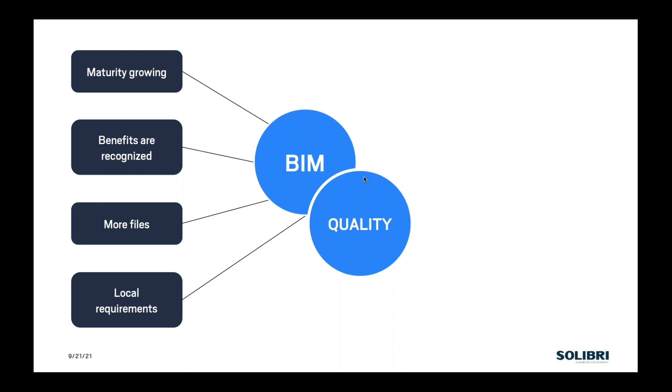We're generating more files, we've got local standards and mandates that we're understanding. But really, when it comes to quality and Solibri at the moment, we see there's a need for high quality information. We can see that quality assurance and quality control is more than just design coordination and clash detection.

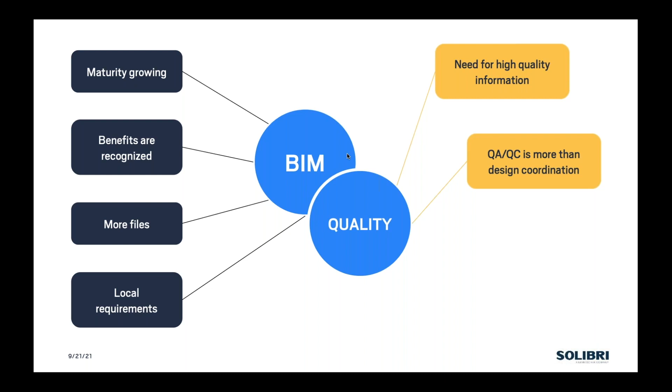For those of you using Solibri and utilizing rule sets and classifications, you'll understand and have seen the benefits of exactly what there is, whether it's fire stopping or egress analysis. Simon's going to talk a little later about the big picture on rules in general, but also go into some detail on what these rules are all about that we're discussing today.

Awareness of problems throughout the life cycle of build - I'm going to talk a little bit about the cost of issues and when to resolve them, and why it's best to do it at the earlier stages.

But naturally, big buzzwords like interoperability - a huge focus point for Solibri this year has been all around opening up our tool to be available within others, making sure that Solibri is a massive endorser of OpenBIM, which I'm sure a lot of you are aware, using file formats like IFC, BCF and COBie.

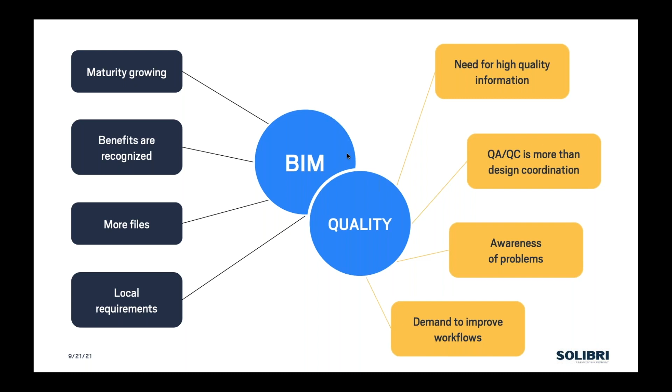So we know this already. When we're referring to things like quality, we understand the importance of both time, money and scope as huge factors towards improving our standards and improving our workflows and processes surrounding quality. We're going to get into a little bit more detail on how we break that down today.

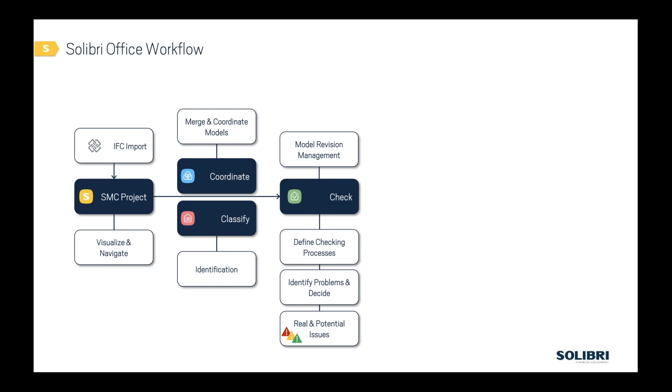And that's encapsulating the introductory level of Solibri through to being able to identify problems, a huge core part of Solibri. But once we've found those problems, we're going to want to communicate them.

So within the communication area, we've got tools such as BCF Live Connector, which enable us to integrate with issue management systems on the cloud. We can export those BCFs out if we want to, and share both Excel reports, BCFs, and communicate with people the issues and challenges that we found from our checking results.

But the functionality that we're talking about today are new rule set templates to do with egress analysis and fire-stopping rules, which is the exciting demonstration and presentation Simon's going to do in a little while, which is the way in which we can more intelligently and deeply find potential issues with fire-stopping.

And it's only once we've managed to locate these problems, fix these problems, can we really start to do information takeoffs, deliver COBie, deliver our models, and understand that that information is reliable and fit for purpose. So that's the bigger picture on the Solibri Office workflow, which we'll get into a little bit later on today.

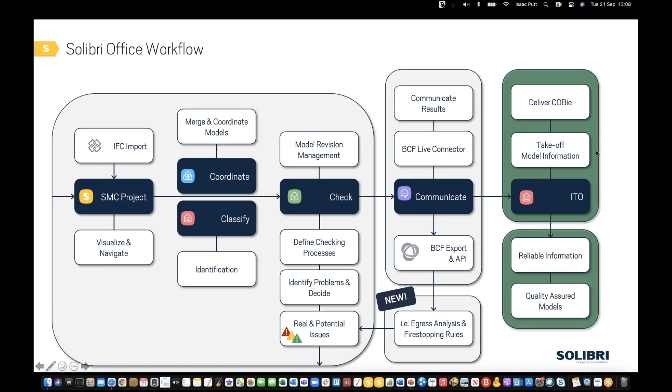So we're going to talk a little bit today about fire stopping and using digital technology to make the right decisions. So you'll see littered through this presentation, there are a few QR codes that you can use to access various bits of information.

So for those that aren't aware, Ridge Partners, we're a multidisciplinary property and construction consultancy. We have over 600 employees spread across 12 UK offices, and we pride ourselves on 80% repeat business, and we're 75 years old this year.

So today, my name's Brent Rees, and I'm a partner with the business, and I lead the digital engineering team. I'm going to talk a little bit about the basics of fire stopping and why it's such a challenge in the construction industry. Then Alex, who's a team manager within the team, is going to talk through how we use Solibri to mitigate some of these challenges. And then Mike, who leads some of the digital engineering activities across the business, across our multidisciplinary organization, is going to talk about the benefits for clients and how we might repurpose that for existing buildings.

So a little bit more about digital engineering and our consultancy services. We provide services on projects up and down the country for a mixture of end clients and contractors and other consultants in the industry. We do a lot of work in the information management space, and it's something that Alex particularly specializes in, using tools like Solibri. So the development of requirements and support in the delivery of COBie on projects.

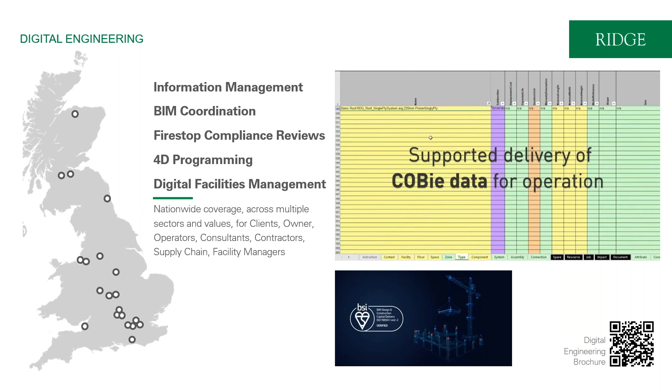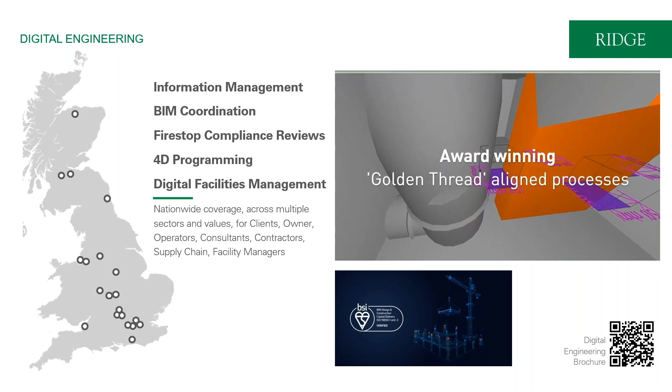Similarly, BIM coordination, another key activity for us, and we do a lot of that for main contractors, where we again utilize tools like Solibri to identify issues on projects and report those back to the team. Firestop compliance review. So a little bit of what we're talking about today is about using models to better design, specify, and utilize information for fire stopping. We'll touch on that a little bit more.

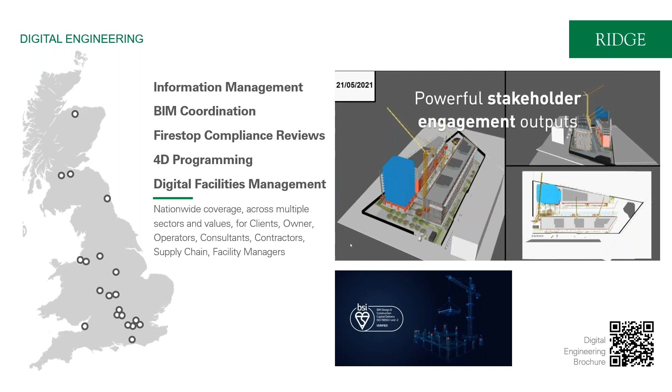4D planning, so the use of tools to bring models and projects to life against construction programs and simulate the sequence of that going together. And the final piece about digital facilities management and consultation in that space to allow clients to make better decisions and use tools to better manage their buildings in a more efficient manner.

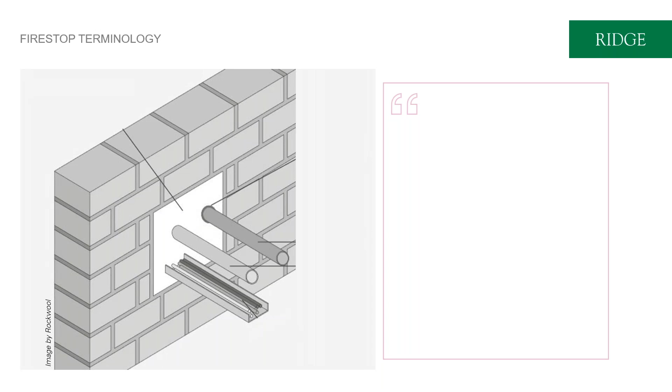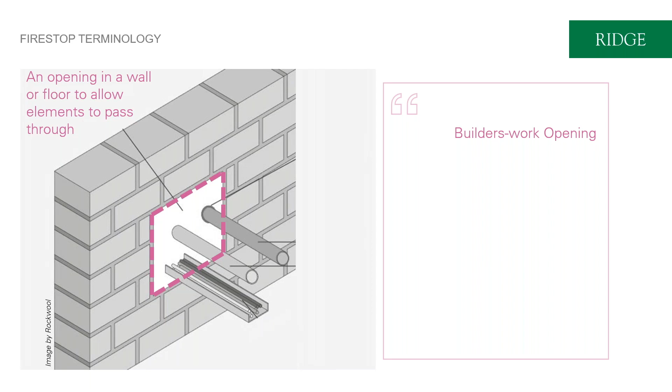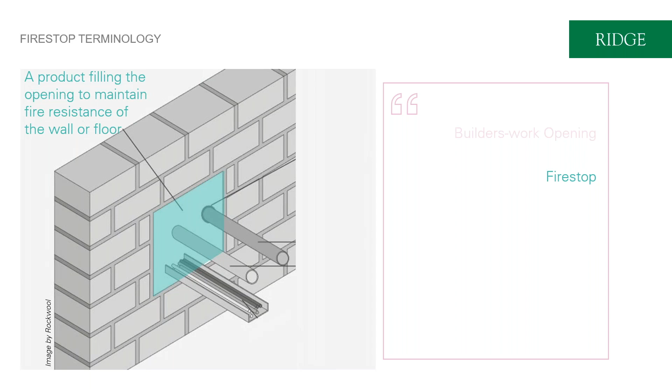So fire stopping, the golden thread. So for my section, if we move on to the next slide. So to recap on some of the basic terminology. So in projects, we'll have a number of openings in walls to allow services to pass through, commonly referred to as builders' work openings. In order to maintain the fire resisting performance of that wall or floor, that opening needs to be filled with a fire stop. So we'll make reference to both of these as we step through.

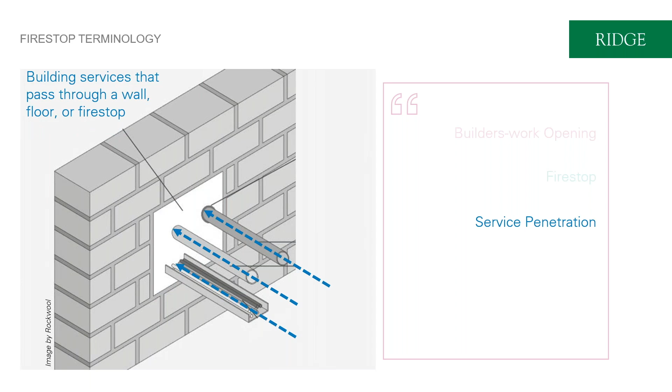A key part of what we're going to show you is related to service penetrations through that builders' work opening and through that fire stop, because that influences the design and specification of the fire stop. Service spacing, so the gap between the services that penetrate that fire stop, is a really important criteria in that, as is the aperture spacing, so the gap from the service to the edge of the builders' work opening, shown in that diagram.

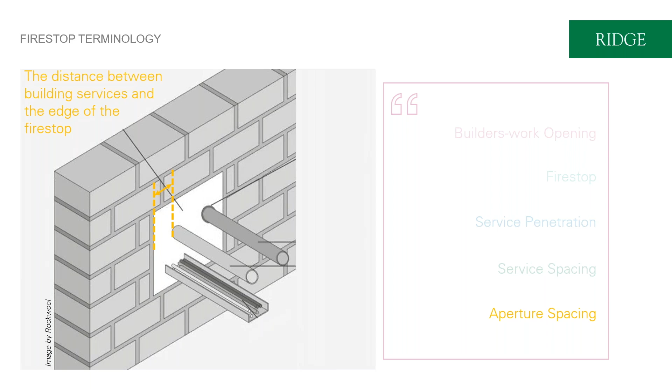So fire stopping generally, anyone who's worked on a construction project will probably sympathise that fire stopping is a notoriously complex and often difficult package to design and get right, because of inputs required from lots of different parties. What really needs to happen is there needs to be better clarity on who actually leads in the design and specification of those, as well as builders' work openings and any dampers that might be applicable to any ducts passing through that.

There's also complications around PI. The PI market is a notoriously difficult place at the moment, and is the PI of a lead designer adequate for them to carry out fire stop design and specification? And then looking across into construction and operation, the process of installing these and then managing those through operation again is a notoriously difficult aspect of fire stopping. Next slide, please.

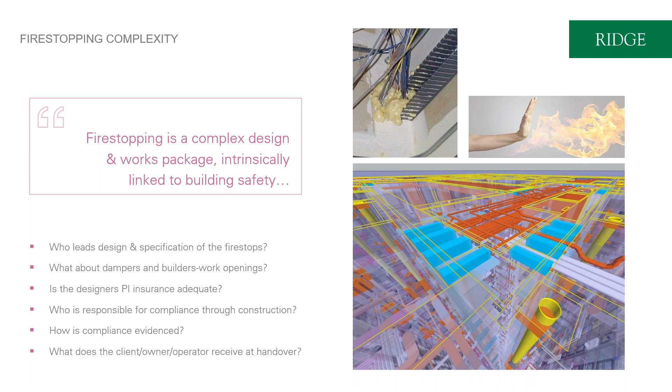Add to that, Approved Document B of the Building Regulations has always had a line within it that any proprietary sealing system, i.e. a fire stop, needs to be shown by test to maintain the fire resistance of the wall, floor or cavity barrier, meaning that if you have a fire stop in a builders' work opening and a configuration of services penetrating, that configuration needs to be shown by test to perform for the required time period.

The difficulty with this is that only a finite number of scenarios have been tested. So there's a rule for different types of materials of services passing through a fire stop, which need to be understood and applied to the specification of a fire stop.

On top of that, I touched on the multi-party process that is fire stop design specification. With regards to this scenario, you would have one party that would ordinarily design the partition and the opening within it, and another party that constructs it. It would be another party that would design the services, the service distribution, and then another party would install them in the spaces accordingly. And then it would be another party that specifies the fire stop and installs the fire stop.

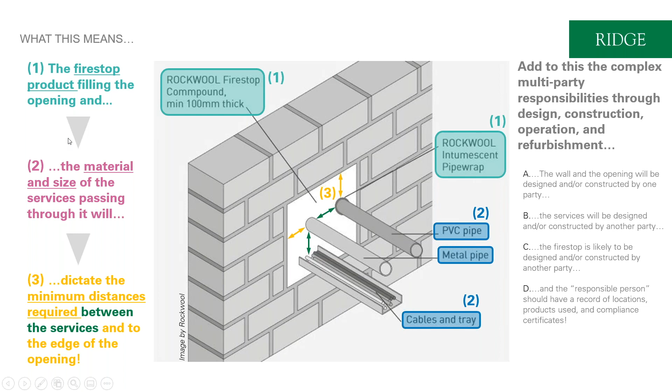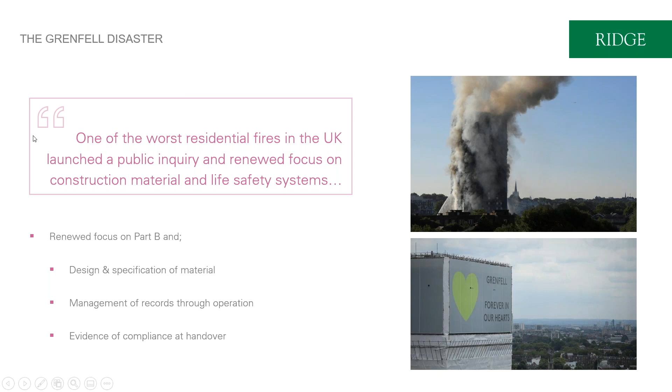Add to that that the client then has a duty to maintain that through operation and understand the decisions that were made through design, and that further highlights the complexity of the situation. Add to that, a few years ago the Grenfell disaster brought renewed focus on design and specification of materials generally, and so whilst that wasn't directly attributable to fire stops, it's clearly a key aspect of fire design in buildings.

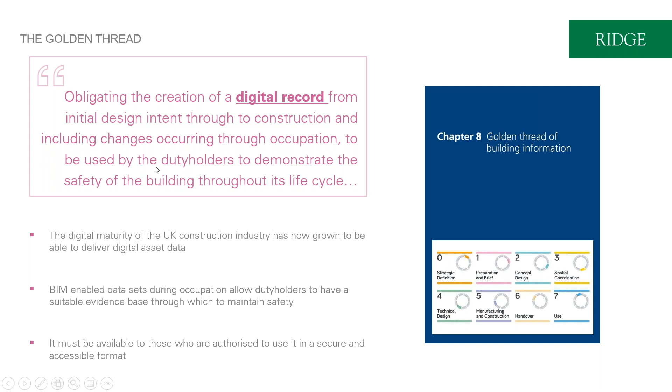A spin out from the Grenfell disaster was the Hackitt report, which made some pretty stark recommendations about the state of the industry and aspects that needed to change in order to give residents a safer place to live. And if we go on to the next slide, a key component of what's come out of this is the golden thread, a recommendation from the Hackitt report, which recommends the adoption of digital and BIM processes in order to better deliver information to the clients at the end so they can better manage information about the building through operation. And I won't touch too much more on that because I'll pass over to Alex.

Thank you, Brent. So I think you set out some of the issues that happen with fire stopping. So let's have a look at the digital approach that we've developed to try and alleviate some of these. So this brings us back to 2015, before my time at Ridge. Fun fact, 6 years ago, isn't that scary? To the first project where we worked on to develop these rule sets and how we went about it.

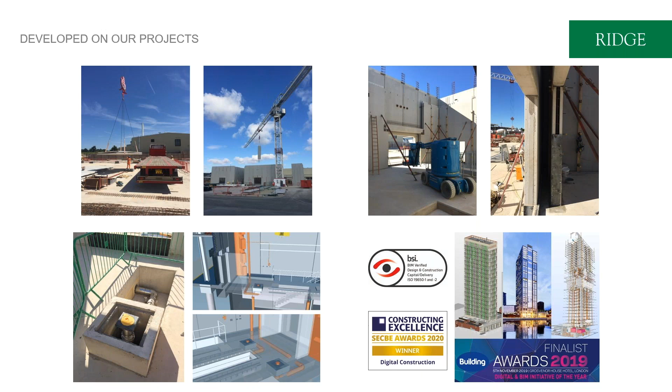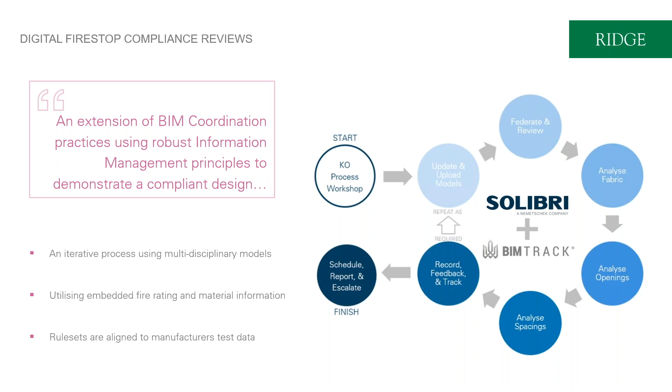A lot of this is best done in a BCF tracking platform, and comments can be made. But as you can see from the process diagram, it's about federating the models, analyzing it's got the right information in there, analyzing the size of the openings, the distances of the services, the distances between the services and the edge of the openings, reporting these as issues, and then eventually scheduling these out so that it can be improved on site. And it's really important, one of those bullets on there is that these rule sets are aligned to real manufacturers' products and real test data for the information that will give the value.

So who's this relevant to? A common misconception will be that it's only relevant to high-rise residential buildings, whereas it's not only relevant to all residential buildings, but most buildings. There's fire stops in most buildings, there's fire compartmentation in most buildings, and this really should be something that is looked at and done, as Brent highlighted, on most buildings. It'll be useful for designers. I think fire stopping is one where you might hear audible groans from designers when it's mentioned, because it's left out of scope.

It's quite a grey area of who should be doing what, and it's not always something that is done well and is something left to the last minute, and you end up with changes on site. So getting a better design, improving set roles of who's doing what, will also improve professional indemnity insurance, PI insurance. It's useful to contractors for reducing risk on site and for the buildings that they deliver, but also through pricing.

So if all of the openings are designed, the sizes are known, the product manufacturer has been chosen, then the contractor will know how costly it will be to procure the fire stopping products, how costly it will be to actually install them, and it will reduce risk for when they're tendering and for their price, and also for when they're tendering for maybe an M&E design to an M&E subcontractor package.

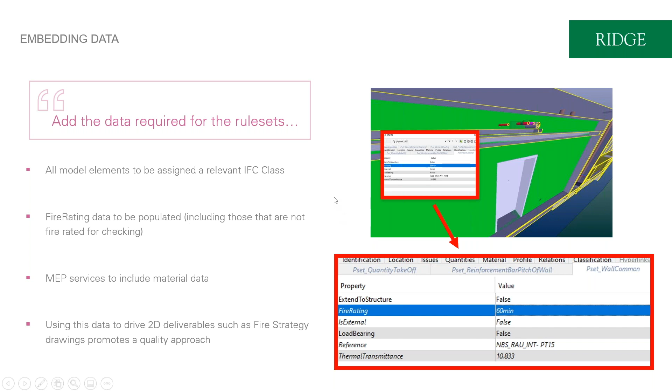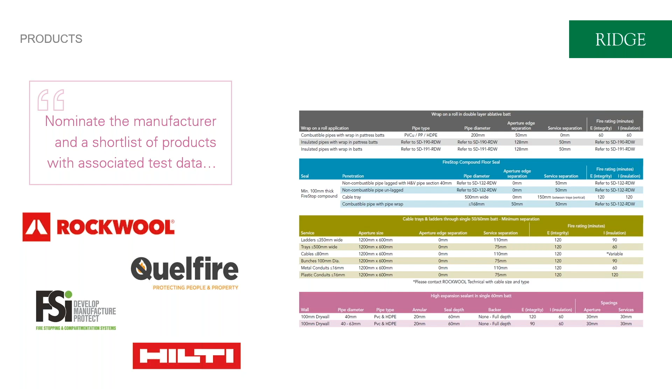Modeling of builders works and fire stops. This doesn't necessarily have to go straight away. You can test the distances between the services before you do that, but ultimately a lot of these services will be put into these sort of letterbox openings, and the arrangement of these services will have to be reviewed and set out, and the distances between the services and the edge of the opening will have to be measured. So at a certain point in the process, it's really important to model these builders works and fire stops and start to put in what Firestop product has been chosen, who the manufacturer is, and then that will bake into what Mike will talk about later in terms of itemizing these, and then what an owner operator does with these in terms of on-site checking.

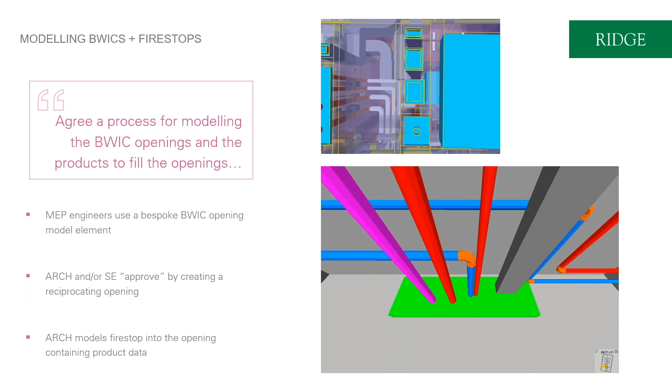So that's my bit over. I'll hand you over to Mike.

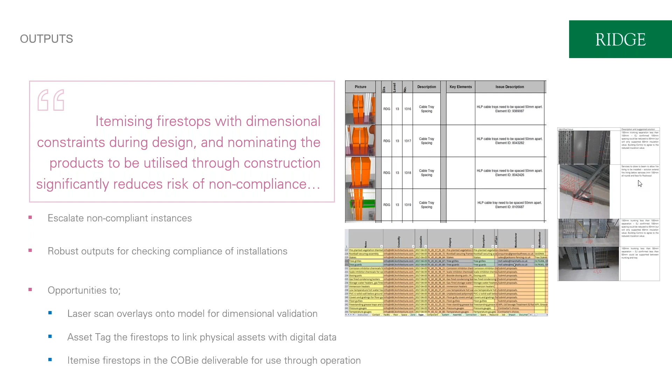Hello, everyone. I last saw these slides before I was working at Ridge, when I was in a client organization at a university as a BIM manager there. And the first thing that sprang to my mind is how many day-to-day running problems this methodology could fix once it's met handover. So the question I'm asking is, can we take this robust process for fire compliance checking of design information and apply it within existing buildings?

So why would we want to do this? 2 out of 3 of today's buildings are still going to be here in 2040. So as problems go, the construction process is only going to fix 1/3 of the overall issue. So we've got this responsibility to ensure that the buildings are safe. And we know if we're going to try and check all of these builders' works openings manually within buildings to make sure that they're compliant, that's going to be a really hard process. And the other issue adding to that is that as buildings change over time, small works contractors might not have considered fire stopping as they've put new services into buildings. So we've probably got the situation that our fire compartmentation lines could be breached. So the question is, shouldn't we use all of these digital tools that are at our disposal to solve the holistic problem?

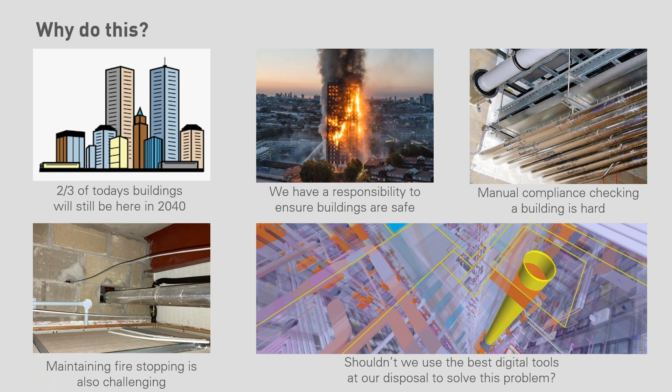So what benefits is that going to bring to building owners? Obviously, life safety is the most critical of these issues, but then also things like the protection of property, the ability to reduce insurance premiums, ensuring that we're compliant with legislation. And I don't think there's anything quite as bad for someone's reputation as their building burning down or something like that. So what this could do for reputation is also worth considering in that mix.

So what are the challenges? Alex and Brent have done a great job of outlining what this process looks like. But what changes when we move into existing buildings is that the data is bad. During construction, we've got lots of information available. As we look at an existing building, that's not there anymore. So there are a few things that we need to do. First of all, do we have a fire compartmentation plan or any information on where the fire compartmentation lines are within the building? If we don't, we might need to do a survey to understand what the fire compartmentation should be within the building.

The next thing is record information. You could see from the process that's been outlined that we need to know what the fire stopping material is, and we need to know what the service types are that are running through that fire barrier. If we don't have that information, we might have to do a lab test on the fire stopping material.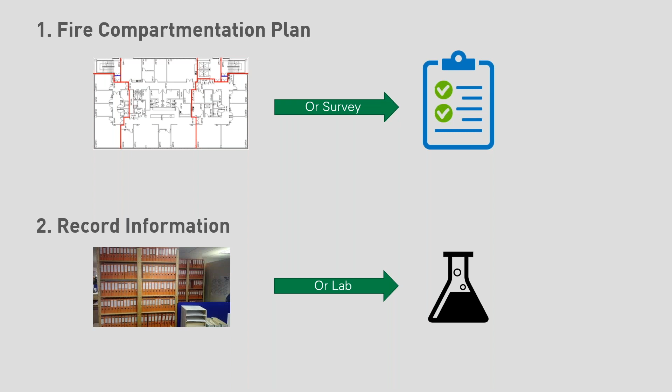And then step 4 is we're going to have to go to site to gather data. Before we do that, we need to make sure that the site is safe for us. So is there existing information around asbestos risk if we're going to have to lift ceiling tiles and things like that, or do we need to do asbestos surveys and safety surveys on site?

Then we can utilize a range of different technologies to help us gather data on site. Point cloud scans, Alex mentioned, but there are also other useful technologies like 360-degree photographs. Standard photography is really good. And there are these devices called confined spaces drones, so you can put drones into areas to undertake photogrammetry and things like that as well.

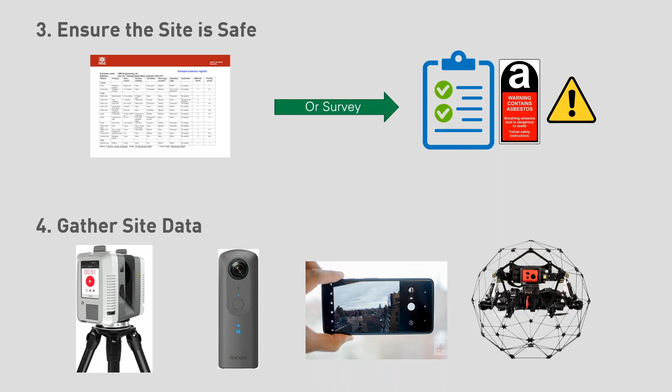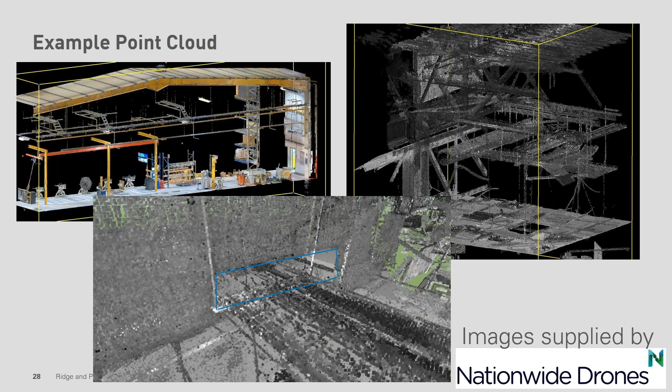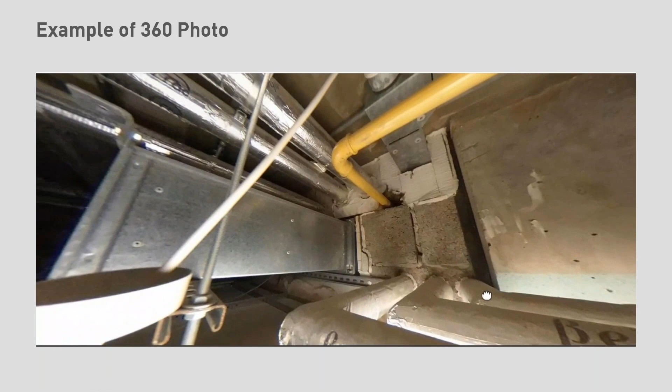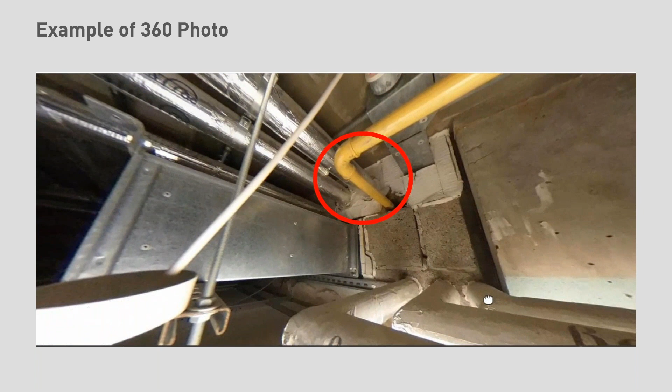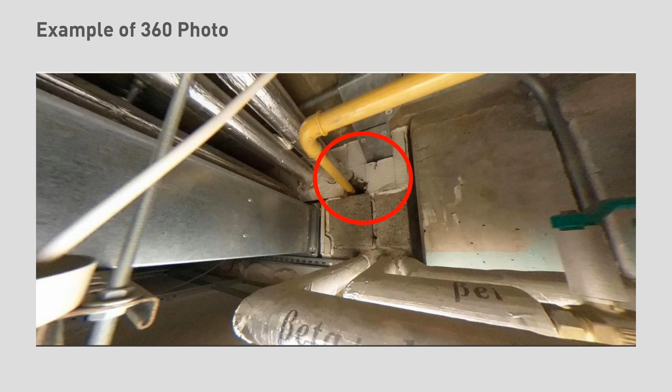This is an example of a 360-degree photograph. Really nice because it gives you that additional context that you don't get with a standard photograph. You can pan around, and I messed up this graphic. I was trying to show here that there's been a pipe added in later, going through the fire stopping material, and the fire stopping material hasn't been filled back in. So that's a problem for that fire barrier.

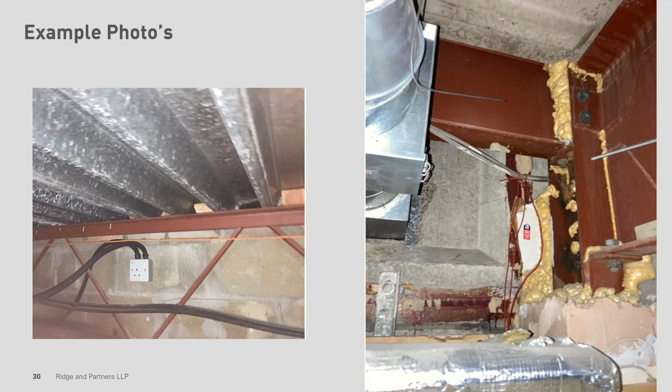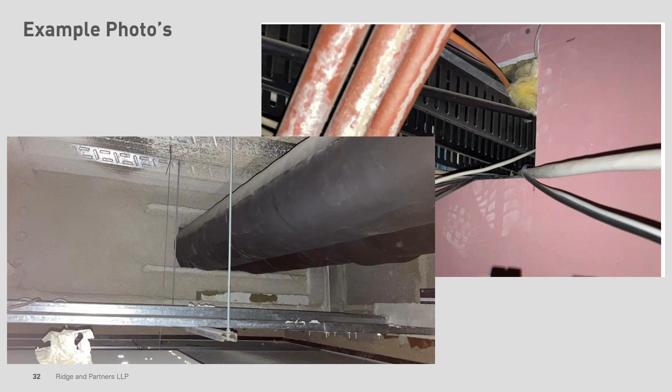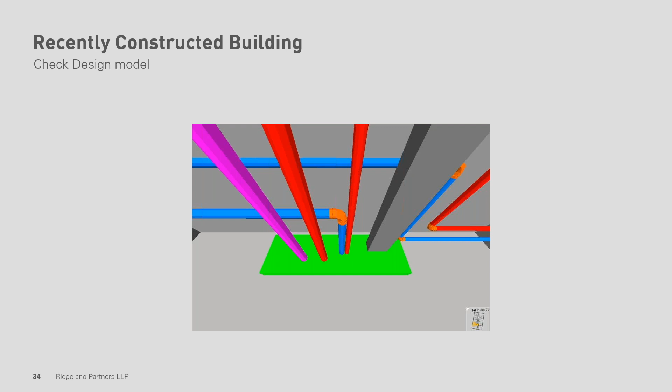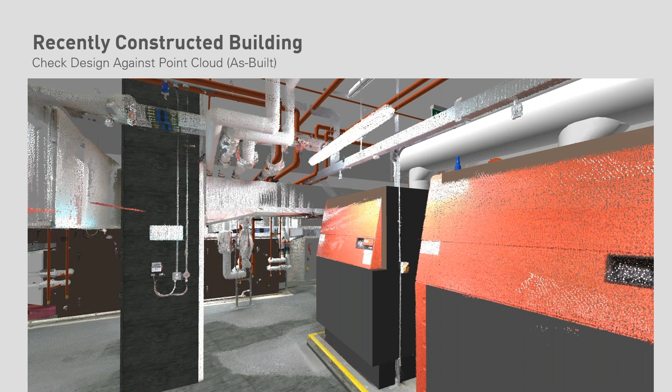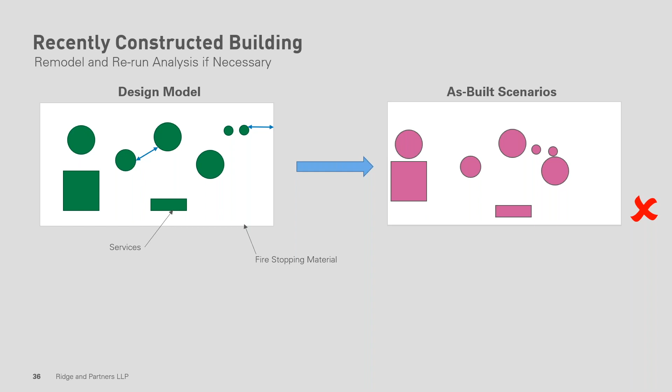The next situation, we're missing that fire stopping material, so we've got a gaping hole, which clearly represents a problem. And then the final situation is the fire stopping material is in place, but the services have moved, and now they're too close together, so again we have an issue.

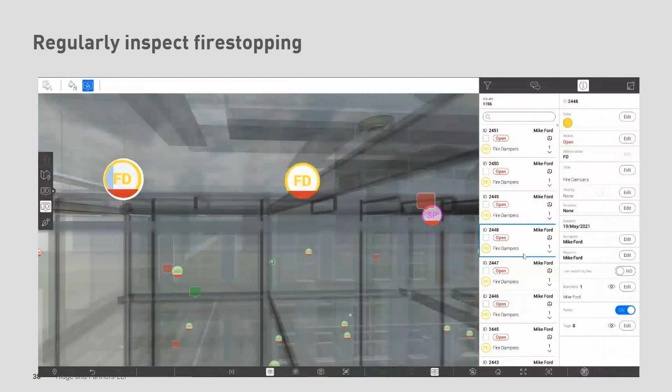Then the third challenge is how we maintain this building throughout its life cycle. So if we've modeled all of these fire stopping materials, what we can do is assign planned maintenance activities to go and check those on a regular basis. You can do this through a model viewer, or through different CAFM platforms, computer-aided facilities management platforms.

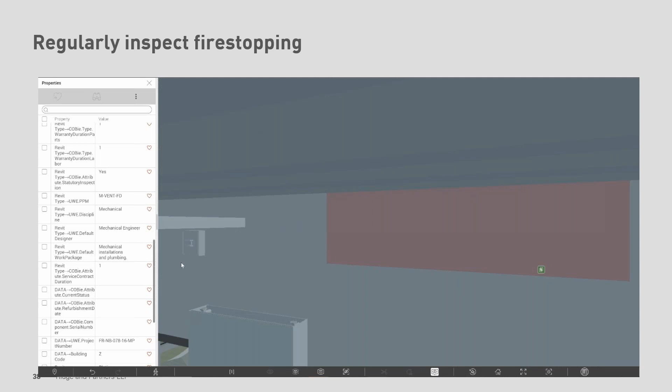The great thing about the model viewer is you can click on the fire stopping materials and get access to the data that tells you what they are and what you're expecting to see. So it would be a good idea to do something like this on a sort of five-yearly maintenance plan.

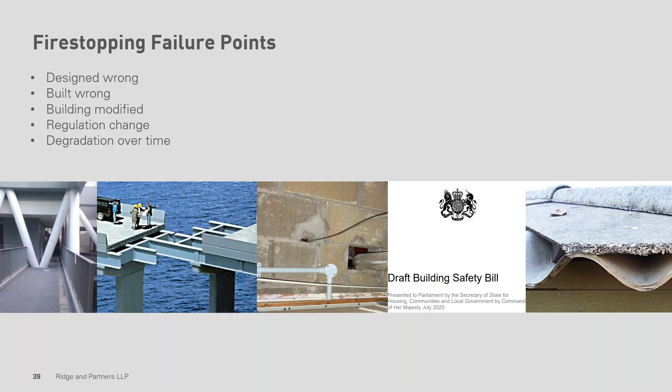And then just a few points on record keeping and awareness. As buildings change over time, for example, we remove a wall here, we're changing that building situation. So think things like the egress, things like the fire stopping in that space, the sensing of smoke and things like that.

All of those things need to be considered when a change happens, and we need to try and keep those records up to date. And awareness being that when we're bringing contractors into the space to make changes, they're aware of which walls are firewalls, and what's needed to make sure the wall is compliant when they leave it as when they started work.

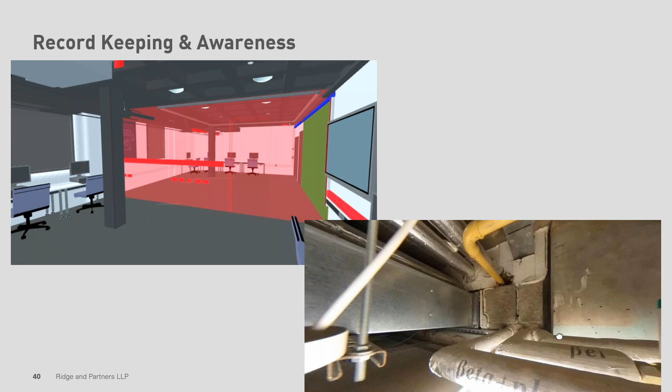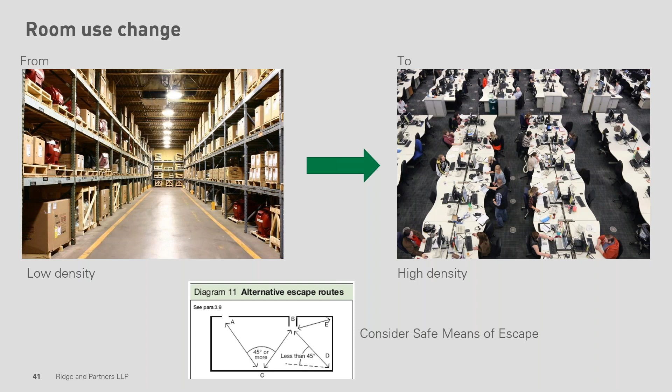And then a few other things to consider around room use and change. So if we're going to change the use of a space, even if we don't change any of the building services or anything else, we need to consider if we're going from low density to high density, what that does about the means of escape and the egress.

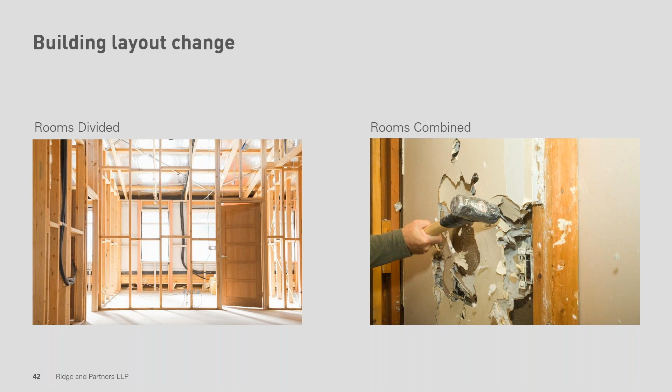So that's me, and I'll pass over to Simon Gilbert now.

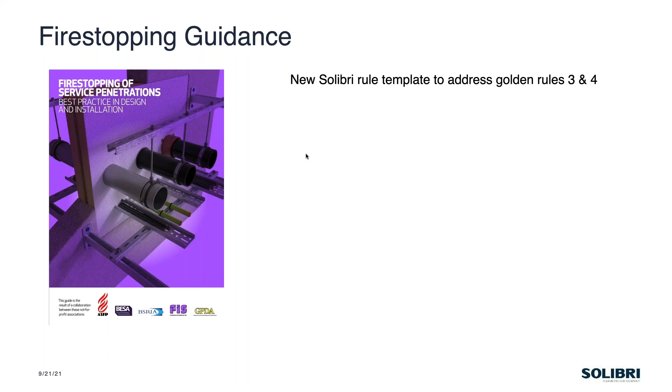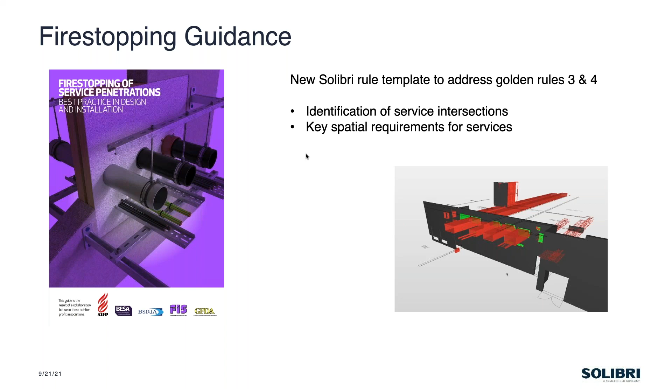And that was to do an identification of service intersections with those compartmentation walls, and look at the key spatial requirements for those services, i.e. the distances between each of the services and the openings themselves, or the fire seals as we're looking at them. So that was the basic outline.

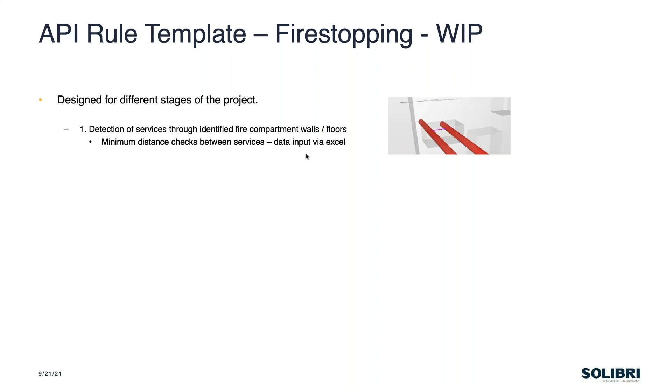As part of that meeting, we identified that it needed to support different stages of the project where certain data may or may not exist at those relevant stages. So the first stage was to take a model and be able to identify the intersections of those services through those fire compartment walls and floors, and do a very basic minimum distance check between the services, being able to do that via Excel, or import a sheet to do that kind of data checking.

When the project moves on, we may have a situation where the fire seals or firestopping objects have been modeled, in which case we would then be able to check the distance requirements within that seal on its own, to the edges of the fire seal itself, and the distance between different fire seals in the same compartment wall and floors. But at this particular stage, there may not be manufacturer-based conditions.

What we'd like to be able to do is manipulate those sheets. Some of the challenges are that test conditions from different manufacturers don't always conform to a standard. So that will be a job to try and automate some of those imports of data from people like Rockwool, Hilti, and other providers. And we're going to group those results based upon the fire seal themselves, i.e. what services go through that fire seal.

If the fire seals or fire stops have been modelled, we need to ensure that the builder's work holes that may exist or have been punched in from the structural and architectural models conform and are an exact match for the fire seal. So there's a comparison or coordination between those two objects to ensure they are coordinated.

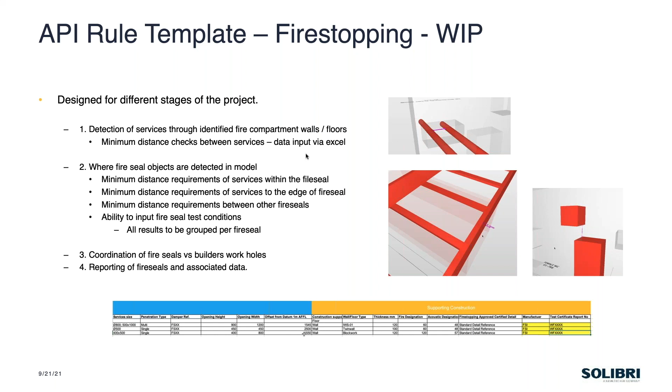As Alex pointed out, it's an iterative process. At any point in time we can grab a report, collect all the fire seals in the model, and gather all the information from the fire seals and the supporting construction the fire seal is sitting in, so we can pull out all the relevant data. This involves not only clash detection, which we could do inside Solibri, but also linking that clash detection with the intersecting volumes.

And then checking the distances in one rule rather than creating multiple rules. So without further ado, I'll move over to the Solibri application, and I'd like to thank Laing O'Rourke first for providing us a very basic model to test some of these conditions. Thank you again.

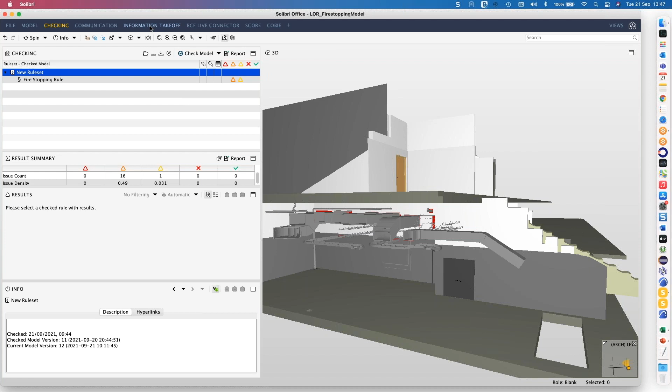Another item Alex pointed out, which was absolutely critical, is that we can't do any of this without consistent data and information that we can hook into to check these conditions. So having a well-defined definition on the project is really important. What we have here is the ability to classify using the classification system for fire seals.

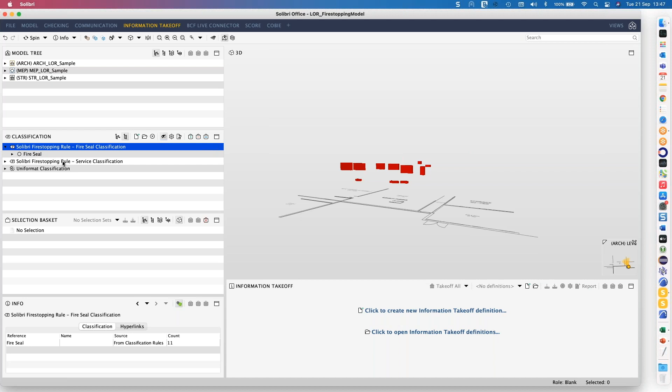In this case it shows us the fire seals or fire stops that are in the model. Terminology needs to be set as well, but the idea is we'll create a classification that highlights those objects. At the moment we've only got one here, but these could be test cases that have been generated. We also have the service classification, which identifies all the services within the building. At the moment we've only broken it down to the key elements, but you could have pipes and their relative sizes, a more granular classification to do that.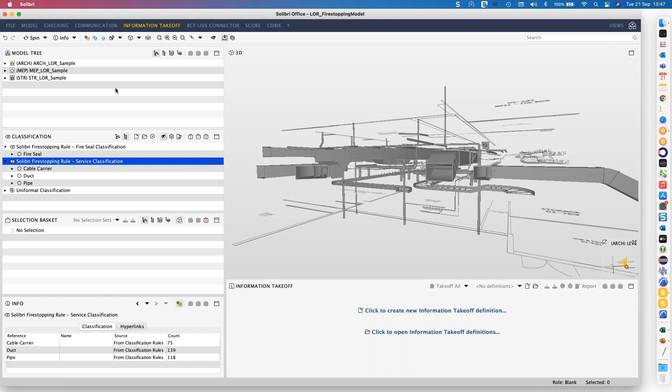These are going to feed into the rule for us to select that. But we also need to know, from a fire compartmentation part, which walls and floors should be included. So if I go back to the checking area, we look at the fire stopping rule we have here. The first part of the rule gives us the ability to specify the compartmentation, so the walls and floors that should be included.

In this case we've just included any of them because it's an example file, but you may have to either create a classification or select those elements via the parameters needed. The services will take any of the services from the model, so we need to indicate which services are going to go through. We then have the ability to use this service classification for the distances and the data between those elements. Now this rule has two levels.

It has the check with a fire seal. If the fire seals have been modeled, we can activate this function. If we don't do that, it will just use the service classification and the data within the requirements path down here. Once we indicate that the fire seals are modeled in the project, we can then use the classification for that as well. All we do with the requirements path is put in the Excel spreadsheet, which drives the functionality as far as the distances.

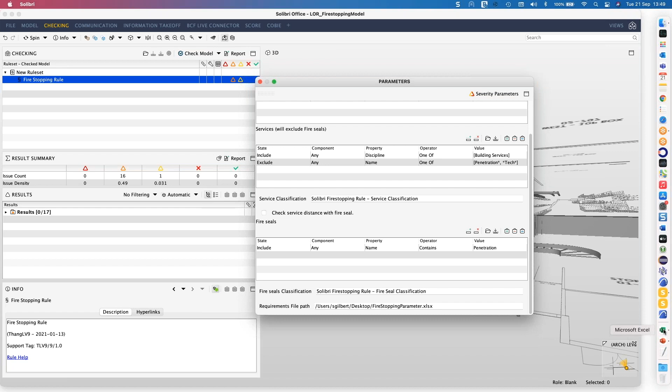And if I were to go over to the Excel spreadsheet, it's very simple here. In this case we've got our service distance, with the source service type against the target service type. The idea is we could have cable carrier against all elements, or ducts against whatever, so we can extend this list and import it in.

I see the challenge will be to try and emulate the requirements based upon what's in the manufacturer data. Now, I've put in the distance, so at the early stages, what we were just trying to do is a very quick check of, if a service actually clashes with the walls, is there a standard dimension between those services that needs to be adhered to.

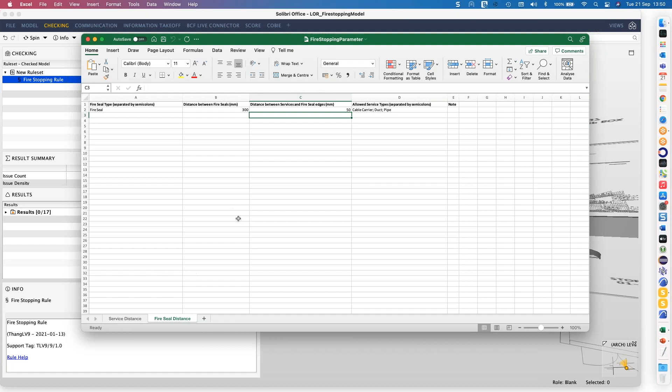And I've put 300 in here because the model is quite well modeled anyway. So if we put 50 in here, then everything would pass basically. So I'm just going to show it at 300 first of all. And then we have the fire seal information, so we would have our test cases down here, and then we'd actually specify the distances between the different seals and the distances between the services and the fire seal edge for this type of service. So this is going to drive the functionality in the software.

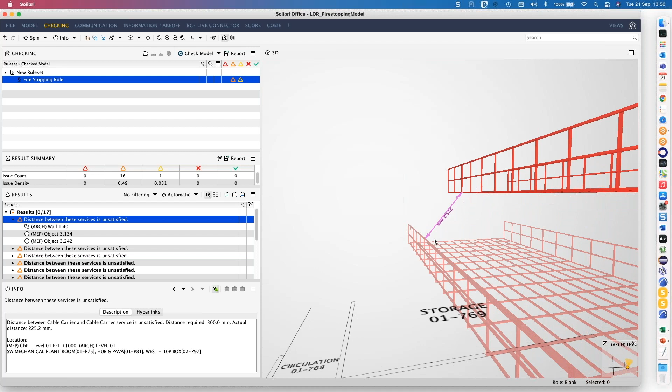So if we go back to Solibri and we've run these conditions, what we've got is the different services which are non-conforming as far as their distances. So we put 300 in, and it's telling us they're within these relevant distances in the model. So straight away we can go through any of these objects and start looking at the relevant distances in the model itself.

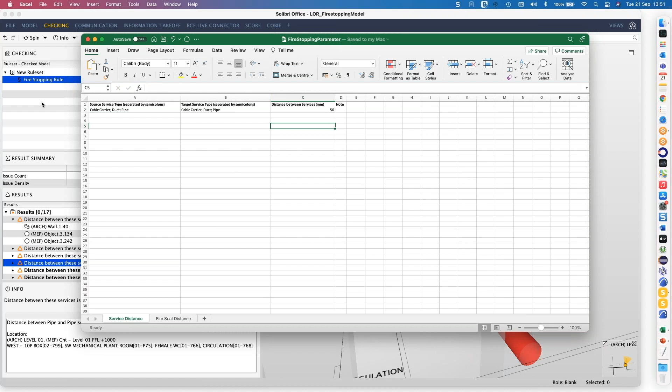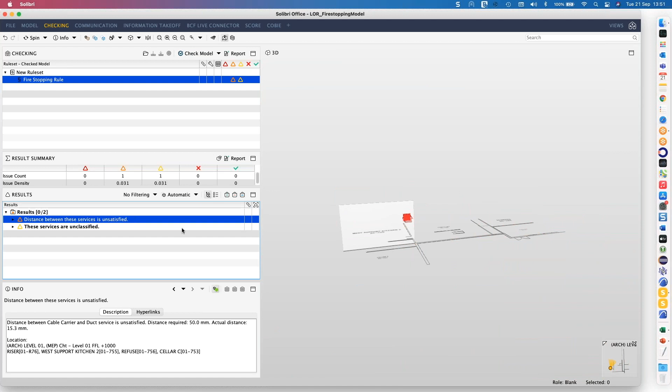If we change the data in the spreadsheet, so if we go back to the service distance and change this to say 50 mil, resave the file, we have to instigate the change in the rule by activating some parameter basically. We'll recheck it, and then I'll turn that back off again. It's just that you'd have these set up with the relevant conditions. Once this is run through now, you'll see that we've only got 2 results here. So we've got distances that are unsatisfied, these ones here, which is obviously the components sitting outside of this fire damper, outside of the seal.

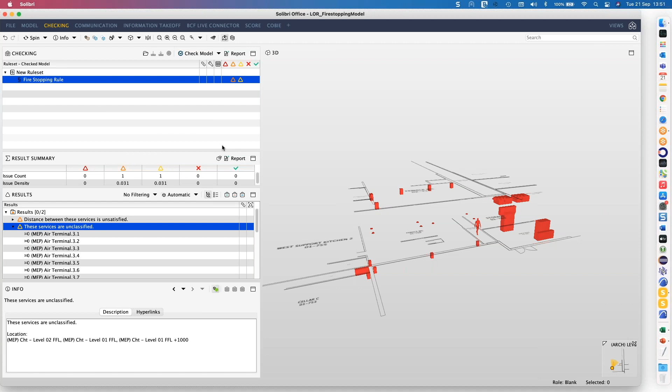And then we've got these services that are unclassified. So what we're doing here is identifying services that really should probably have made the classification, and highlighting ones that may have been missed from the list of services from the classification. So that would be the early stages, where they might not have fire seals in the model. If we activate the rule and actually tick the service distance to the fire seal now, then it's going to use that extra page on the sheet.

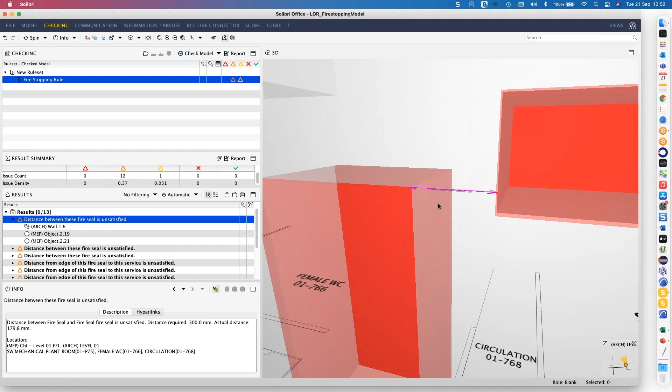And if we recheck the model now, we're looking at the different results in the model, and it's checking those different kinds of conditions. So first of all, we're checking the distances between those fire seals to make sure their adjacencies and everything else are conforming to the value we put in the sheet, which was 300 mil. And we're seeing here that this one's 179 millimeters away. So again, it's giving us this data in the model. Let me just double click, and again, we're seeing the same kind of information between the fire seals.

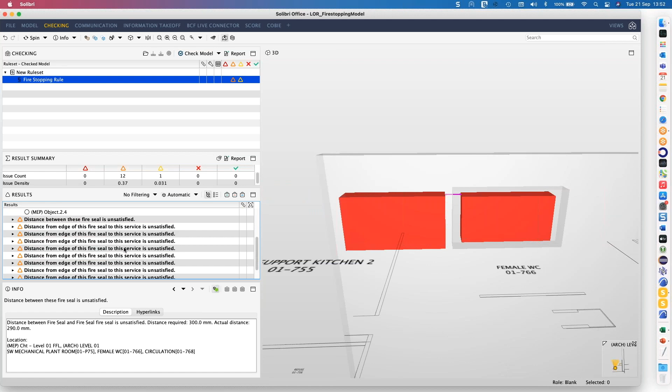And then if we look at some of the services in the model, let's just go to one of these ladders here. You can see that we're now checking the distance to the outside value where we put in 50 millimeters. So you can see 27.5 here. It's to the outside edge of those fire seals.

So the idea is that, again, it's work in progress. We will do a lot more work on this, and hopefully make it available to users relatively soon. But we'll keep working with the teams, with Ridge and the other contractors, to make sure this delivers what those people actually want, and hopefully then it will be applicable to everybody. So, okay, thank you very much for the time and the ability to show this part of Solibri.